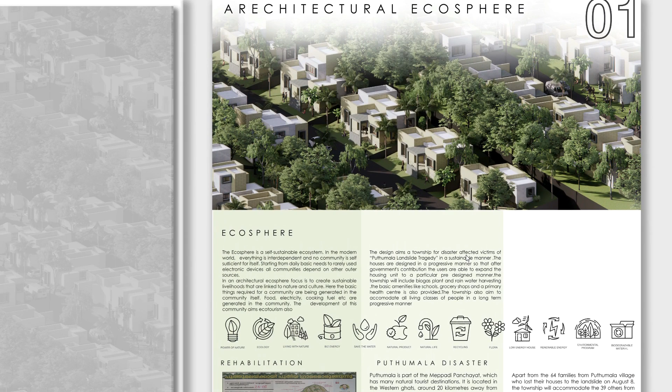I am Abdul Azeem and my project is Architectural Ecosphere. The word ecosphere literally means a self-sustaining ecosystem in which everything is interdependent on one another. An architectural ecosphere focuses on creating a sustainable livelihood linked to nature and culture. Here the basic things required for the community like food, electricity, and cooking fuel are generated within.

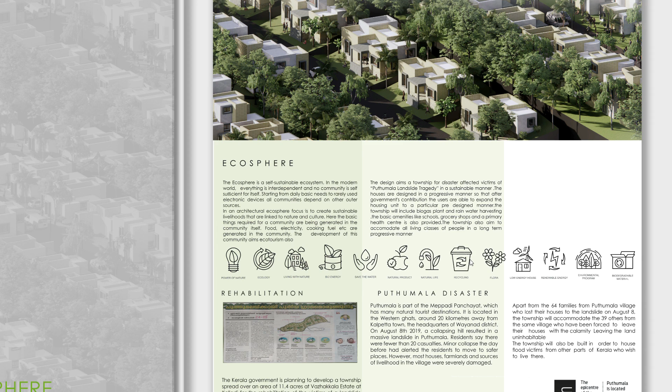In the year 2019, the people of Puthumala, a remote place in Wayanad district of Kerala, experienced a devastating landslide when the place received a much higher quantity of rainfall than expected, which resulted in loss of life, structures, land and their daily livelihood. When I heard that the government is planning to construct a new township for the disaster-affected victims near the affected area, I thought it would be a good opportunity to show how Ecosphere works in a community.

The people affected belong to a low-income group. They were mainly plantation workers and daily laborers. So a rehabilitation project for the low-income group was the key factor for the township.

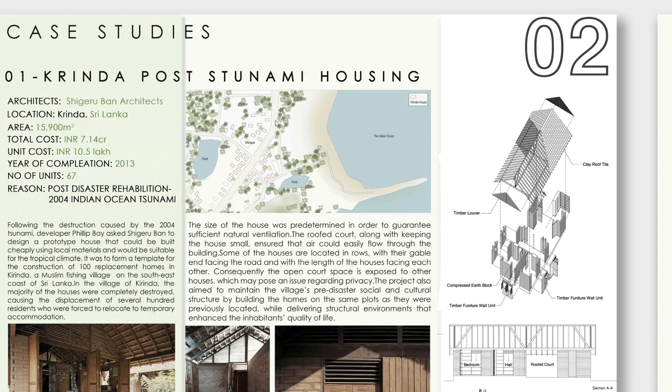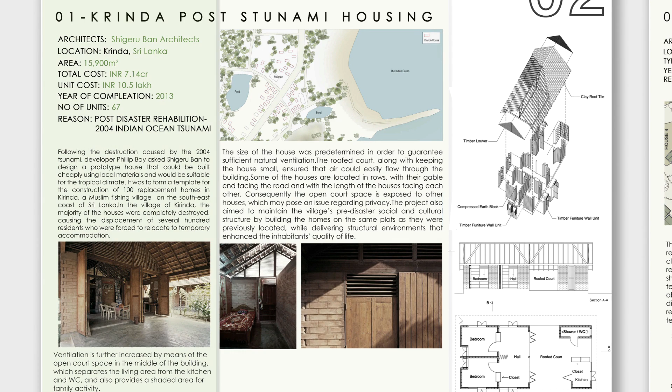These factors led me to check out some similar projects done in similar criteria. Some of them were the Kirinda post-tsunami housing in Sri Lanka by architect Shigeru Ban, in which he designed a prototype that could be built cheaply using local materials suitable for tropical climate. The other was the Jintai village reconstruction in China for farmers, which effectively used the small available patch of land to grow plants and raise cattle within the residential complex.

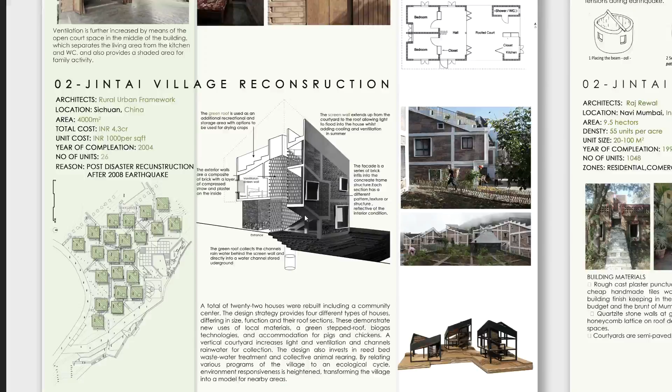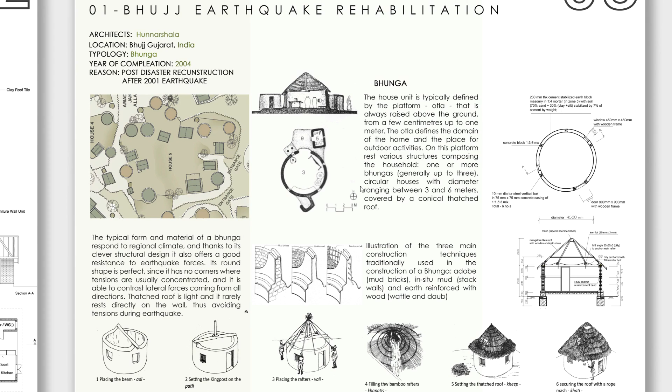A post-earthquake construction designed by Hunnarshala took me to a remote village in Bhuj district of Gujarat, where I got a chance to interact with the people and understand how the round bhunga structures are related to their culture by resisting earthquakes, and how Hunnarshala provided the technology to make it a reality. The people in the village come together to construct houses as a favor, expecting that they will get the favor in return.

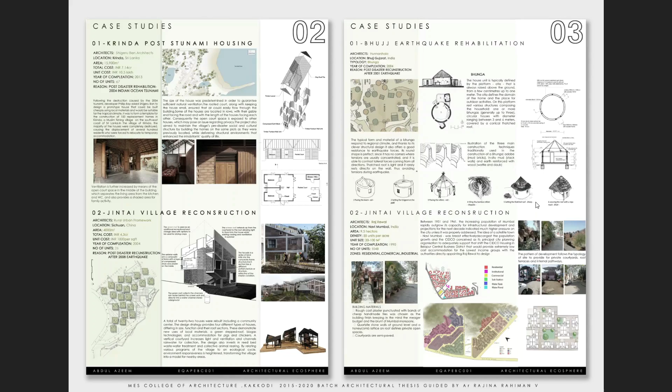So these experiences made me realize how a participatory design process can produce extraordinary results in a rehabilitation project. Also, using local materials and local craftsmen for designing can circulate the project fund within the community.

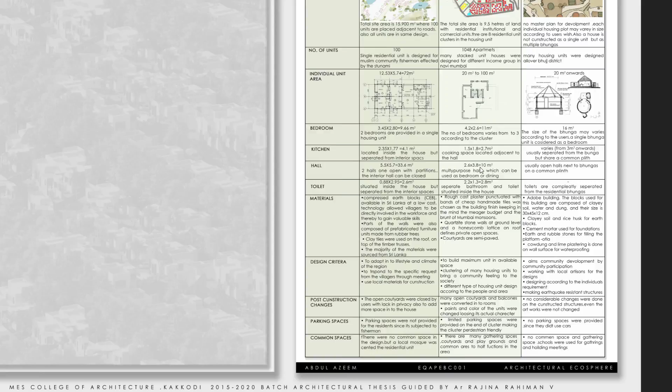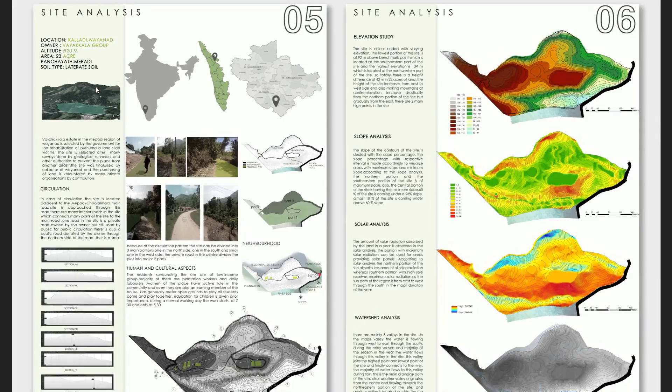So when I came back, I visited Puthumala, where I experienced how people used to live and learned about their culture by interviewing the disaster victims, neighbors, and social workers. I realized that even the women in the family are earning members, and they used to live so close to nature, growing and cultivating plants and animals, and even earning from them.

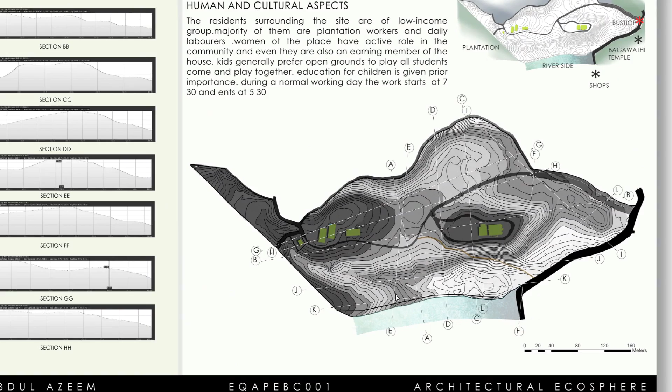The proposed site is 23 acres of land with undulating topography at high altitude in the foothills of the Western Ghats, which is presently used for plantation. With the help of software, I developed maps to understand site conditions with respect to elevation, which has a 42 meter height difference from one end to another.

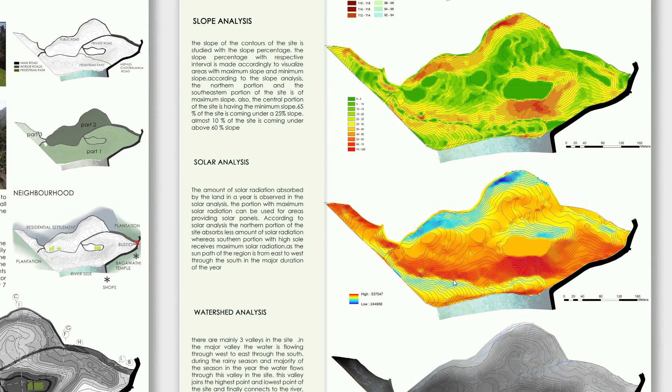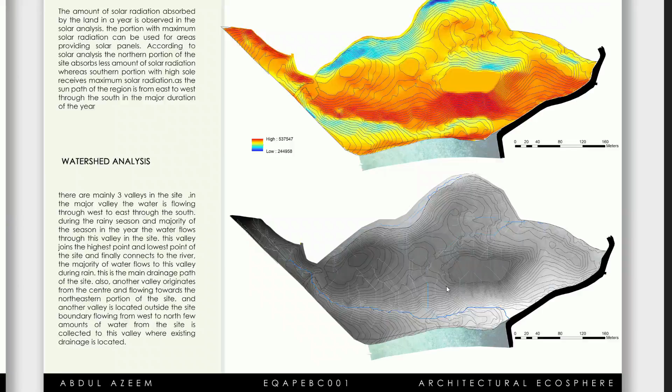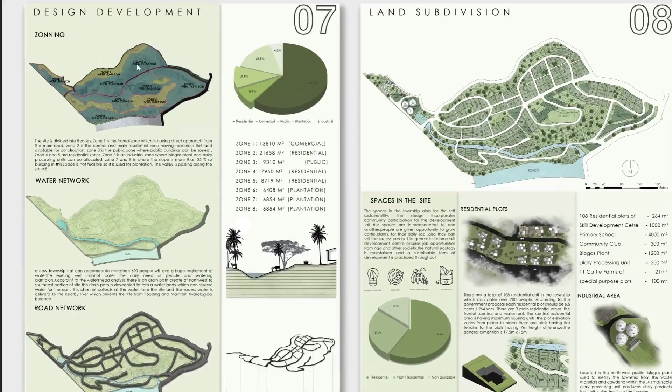By layering all the collected information about the site to determine how the design should be developed, the site was zoned based on its approach, the internal road divisions, and the slope map, which tells us which portions cannot be constructed on. According to these, the zones were residential, industrial, commercial, public, and plantations.

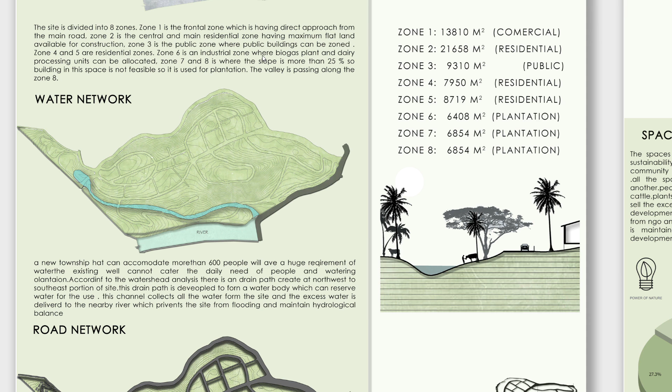In order to solve the demand of water when the township caters to more than 600 people, a water network is designed along the main valley in the site with the help of a watershed map.

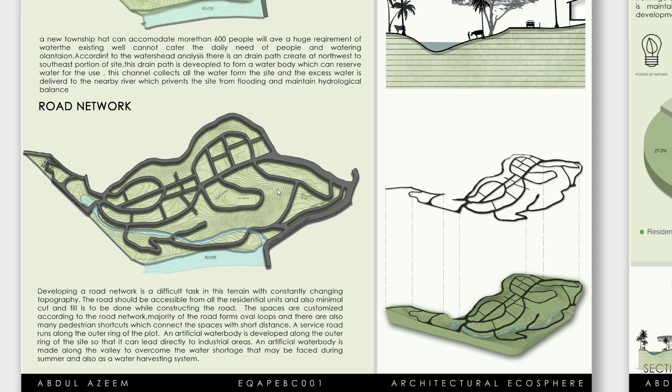The next and most difficult task in developing the site was to design the road network. Since the site has undulating topography, the road is designed by connecting points of the same elevation along the contour, minimizing cut and fill and relying upon the natural slope of the site.

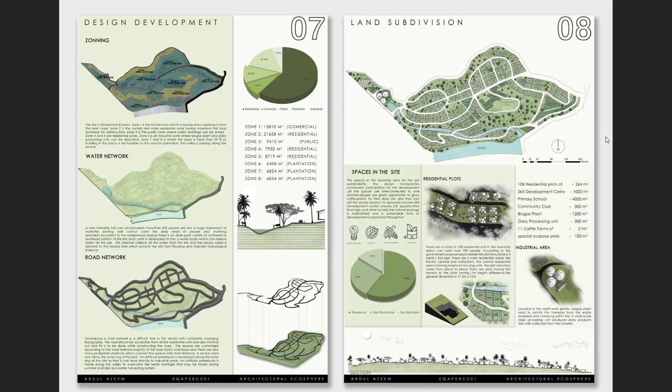So it led to the subdivision of the site by taking into consideration that the township will strengthen local community, connect people to one another, support the local economy in both how they build and how they work, increase biodiversity, improve health and welfare, and support environment.

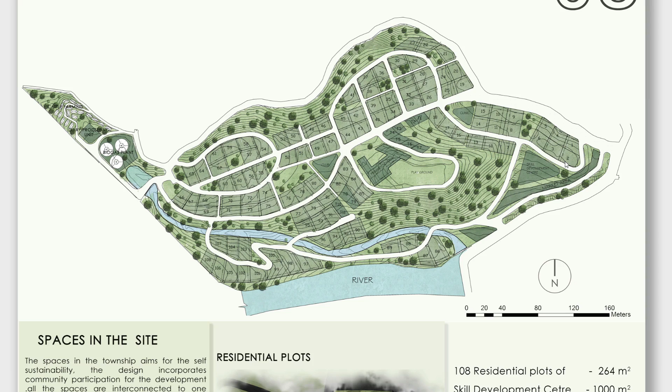Looking on to the government proposal and cross-checking it with what people really need in the township by interviewing the disaster victims, the land subdivision resulted in 108 residential plots spread across the site in the residential zone, where maximum flat land is available for construction. A 250-meter stretch of traditional market space is located near the main road, which will also attract tourists as the site is located in a tourist area of Wayanad.

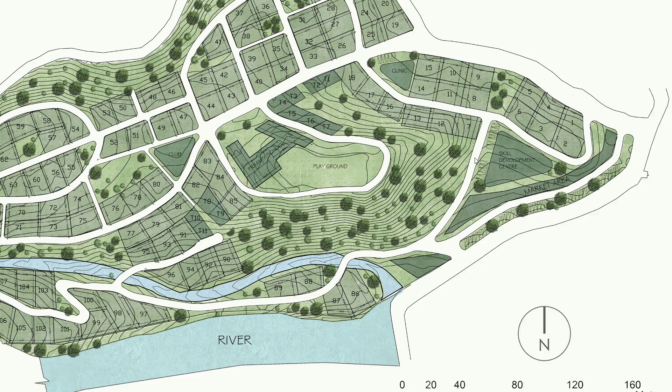A skill development center ensures job opportunity to the inmates by acting as a platform for NGOs and other organizations in or out the community. A primary school with playground, which used to be in Putumala, is recreated in the new township.

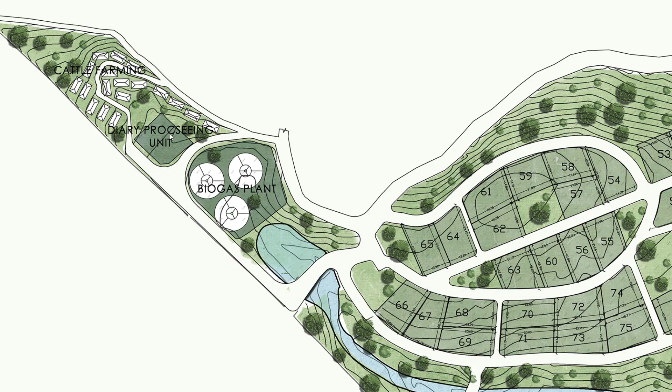In the industrial zone, the biogas plant produces bioelectricity and biofuel using cow dung and degradable waste materials, which electrify the whole township as they only consume a minimum amount of electricity. A small-scale dairy processing unit manufactures products using materials from the site, making every space interconnected to one another as in an ecosphere.

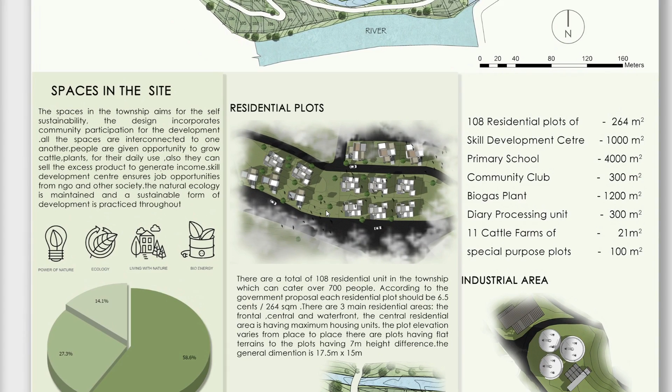Many common spaces are given in between the residential plots where grocery shops are located, and these relaxing spaces can be used to graze cattle and spend leisure time with the community, hence increasing community participation in the township.

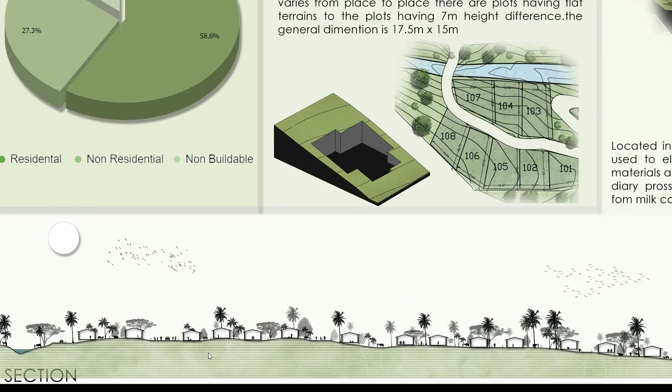Before going on to the residential building design, we must understand the limitations of the present rehabilitation system and develop a design strategy which should be followed throughout the design.

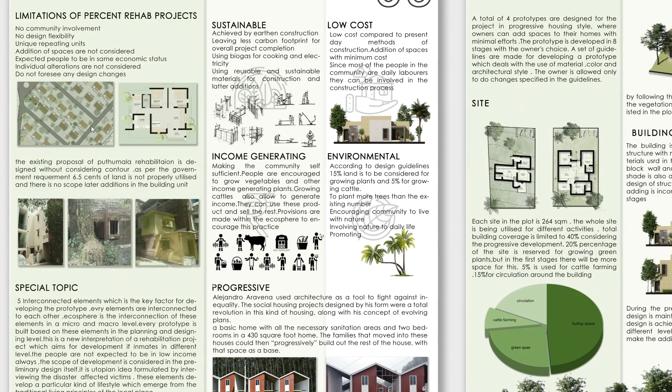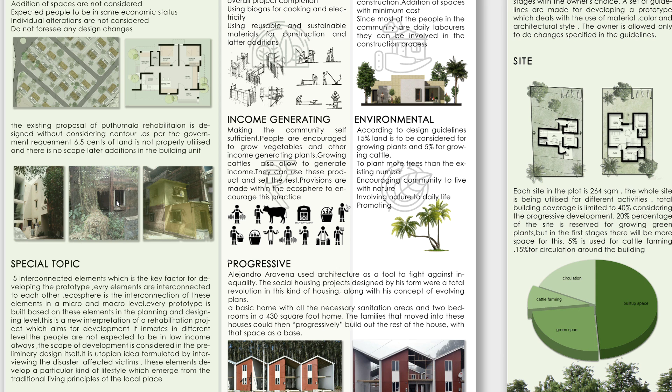Some of the limitations were there was no community involvement, no design flexibility, and the designs are the same and repeating. Addition of spaces was not at all considered, and the people are expected to be in the same economic status, and they do not foresee any design changes that people will alter after the construction.

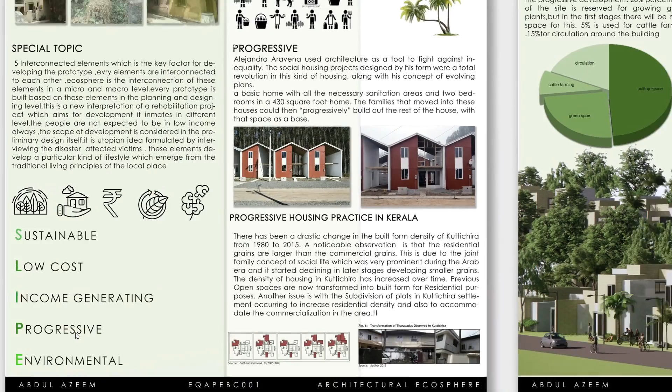So I developed 5 interconnected principles that should be followed in designing the township at both micro and macro level. They are sustainable, income generating, low cost, progressive, and environmental.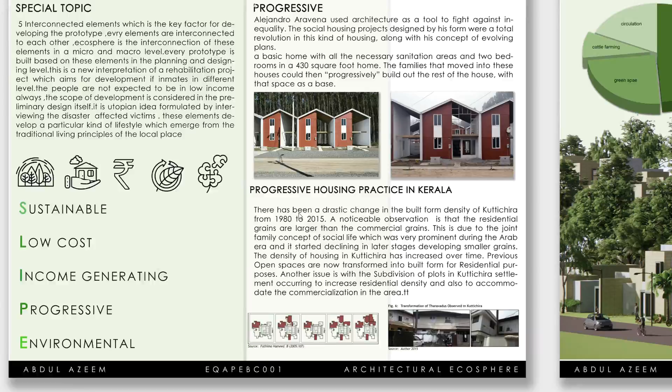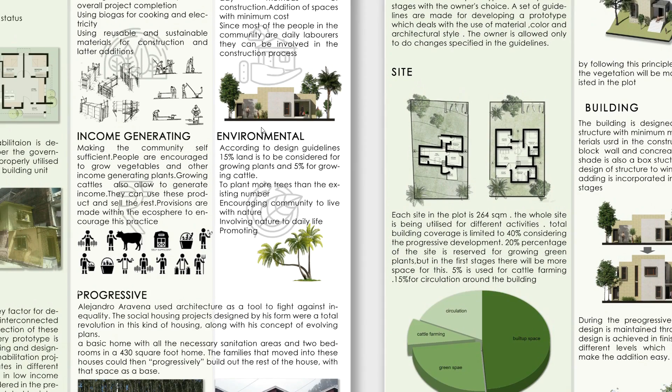Sustainable, achieved by earthen construction, leaving less carbon footprint for overall project completion. Using locally available materials will reduce the cost of construction, which is the second principle to minimize the cost, as many of the inhabitants are daily laborers and workers. Their contribution can be utilized to minimize the existing construction method cost.

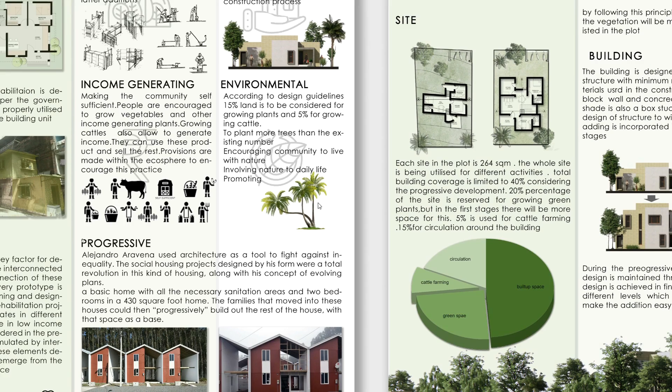In the income generating principle, the people are expected to grow plants and cattle as they can use for daily needs and excess to generate income to the house. As the potential of self-dependency, or Atmanirbharata, is increasing in the present day scenario, the income generating principle is very relevant in the context.

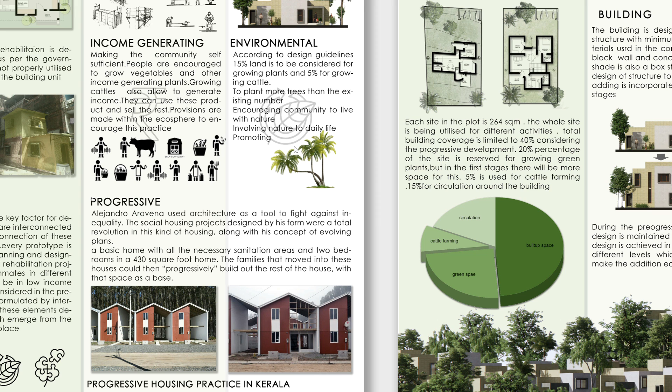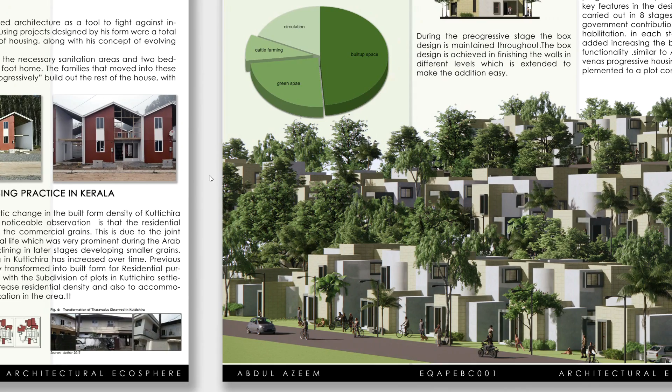The environmental policy literally means planting more trees, that is 15% of the residential plot is to be developed with green areas having plants and trees. So if we can design our residential buildings to include plants, trees and greenery, we are not only benefiting individuals, we are supporting the community at large.

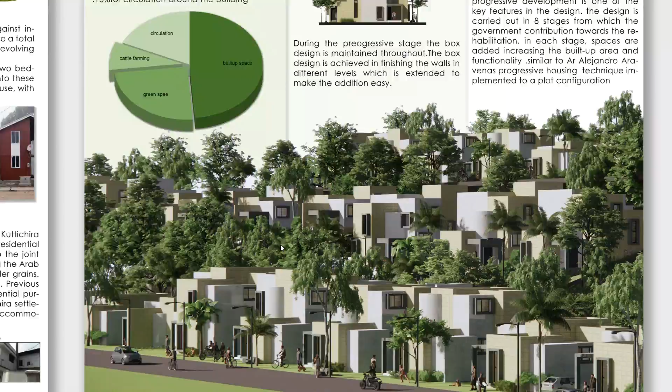All these principles make the ecosphere so interdependent to one another and make the community self-reliant. The next principle is progressive housing. Due to the lack of initial investment, rather than building a small home, half of a good one is constructed, after which people can take over it and develop on their own.

This is practiced by architect Alejandro Aravena in his housing project called Elemental. Similarly, in Kerala, we can experience similar progressiveness in the Kuttichira Tharavadu houses, which prefer joint family rather than nuclear. To accommodate increasing population, the spaces in the house are changed and new ones are added up.

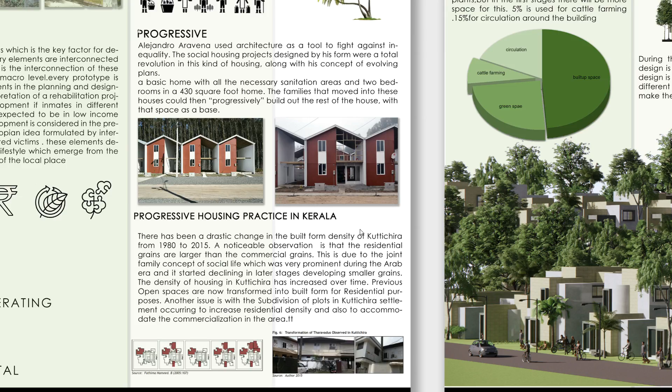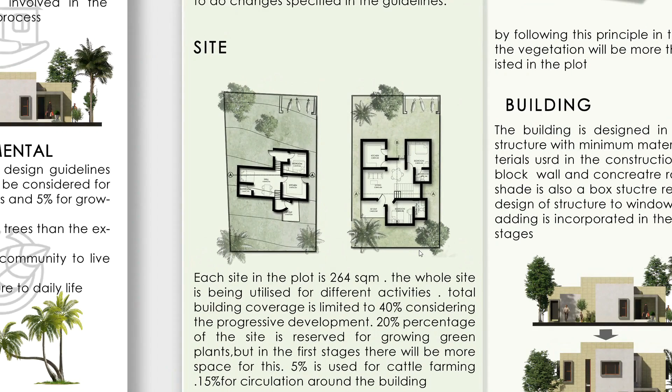Moving on to the prototype development, according to the government proposal, 264 meter square of plot is to be given to all, creating 4 types of prototypes which are designed based upon the plot condition, shape and topography. Every prototype follows similar principles but different designs.

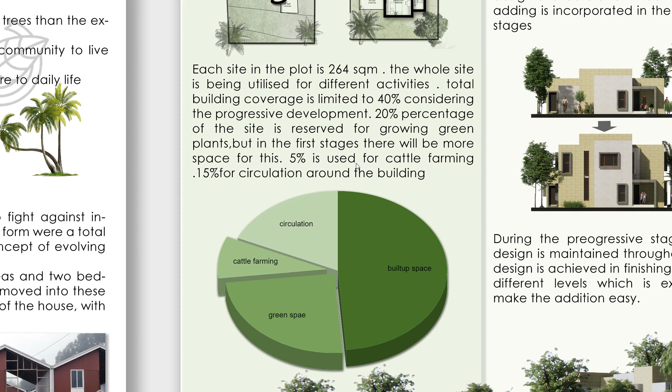At the site level, the whole residential plot is used for different activities. The total coverage is limited to 40%, 15 to 20% to grow plants, and 5% to grow cattle. By following this, the township will have more trees than it used to have earlier.

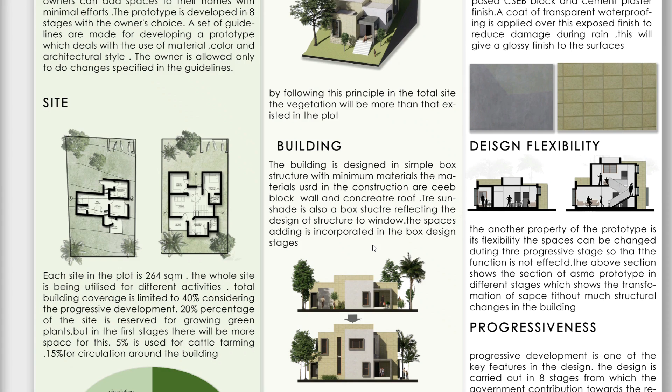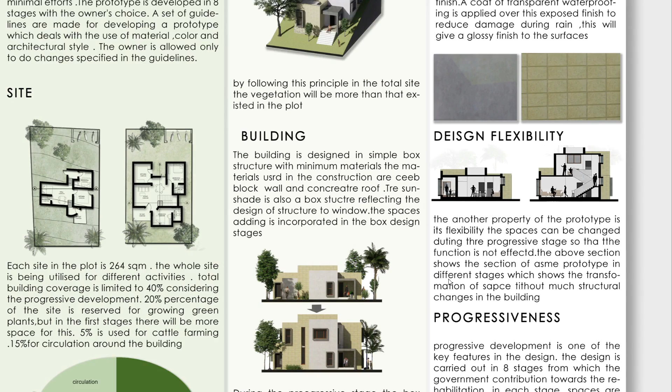The house is constructed in a simple box design using less materials, which are also available locally. The design aesthetics is maintained throughout the additive process. The finished face is exposed CSEB block with cement plaster finish. The design is developed in 8 stages, such that a small space is added in each stage.

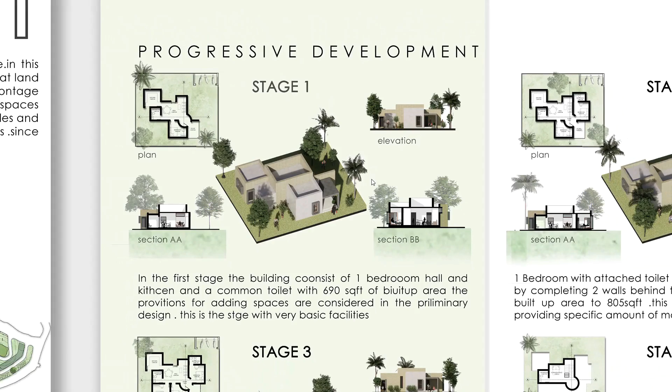Prototype A has 30 dwelling units in a site where the plot is flat or with minimal height difference. The initial spaces are compact, designed by analyzing the culture and requirement of the people. After the government's contribution in stage 1, people can take over and add spaces in stages.

Looking at the progressive housing closer, in stage 2 a room is added, and in stage 3 another. Moving to stage 4, the first floor is added by creating some spaces on the ground floor to accommodate the staircase and other spaces, as you can see clearly in the section.

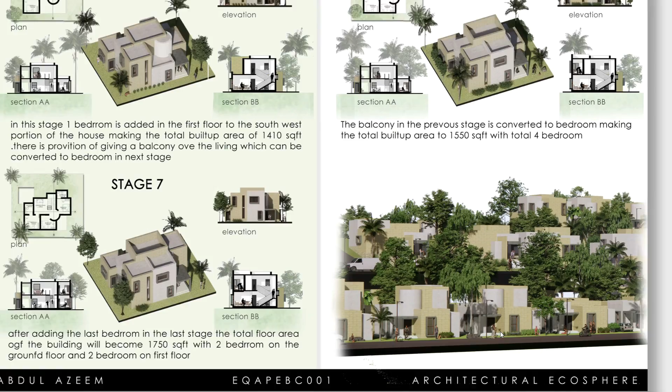Similarly, in the following stages, rooms are added up, finally making a house with 4 bedrooms, hall and kitchen, with an average size suitable for a middle class family.

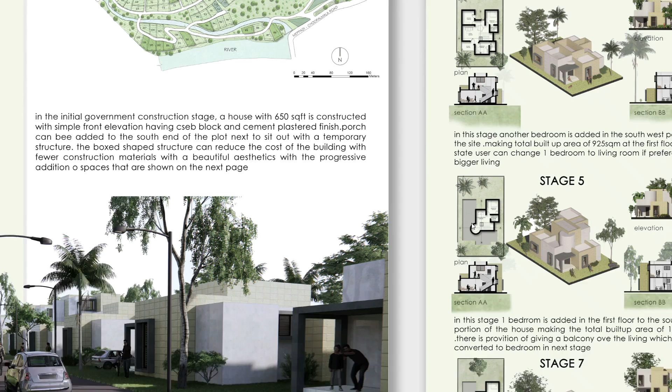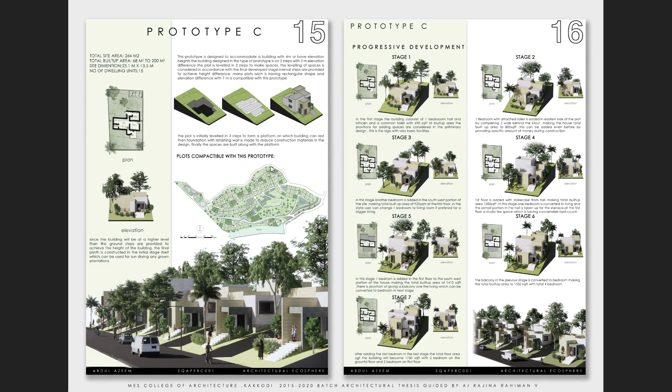Similarly, prototype B is designed for flat land, with the same principle but different orientation of plot. As you can see in the progressive development, it is similar to prototype A but different in design and orientation. Coming to prototype C, this is designed for plots with high contours.

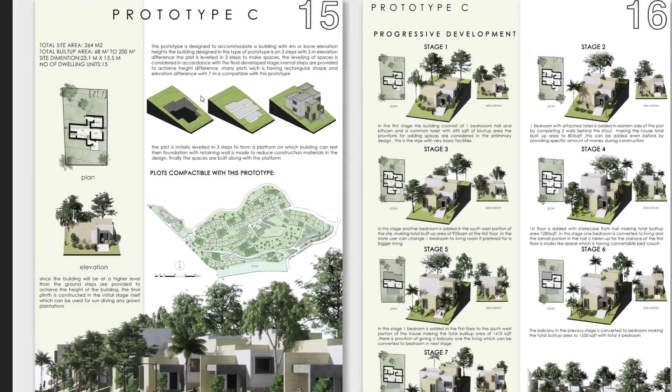These plots have an elevational difference along the shorter side, with a height difference of 4 to 7 meters. In this prototype, the land is cleared in a stepped manner to receive the spaces, positioned along the steps with an internal staircase. Then the foundation is laid considering the final developed product.

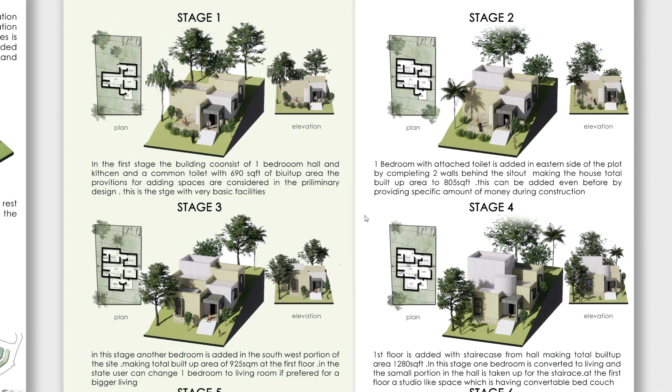As you can see in the development stages, the rooms are added on steps while maintaining the same aesthetics of the box design.

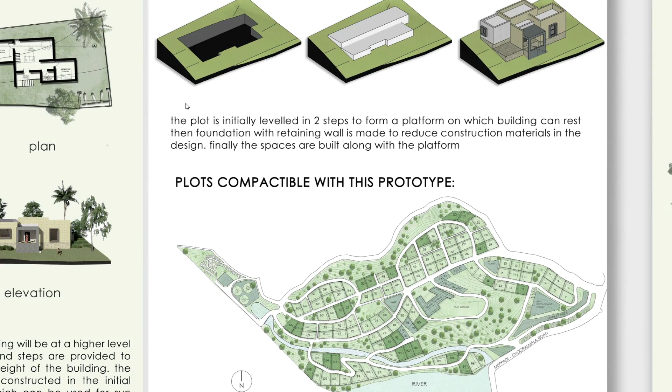Similarly, prototype D is designed in contour but with minimal height difference along the longer side. The box design, which is for aesthetics, can also be used as a functional element to add space in the upper floors, as it acts as a primary base wall.

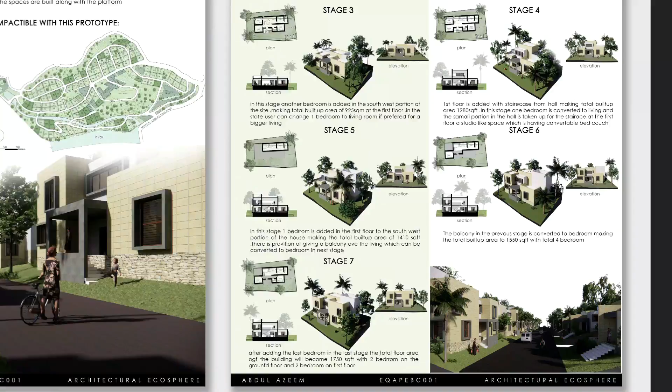Also, the box design is used as sun and rain shades for the windows, which can be placed at different locations to reduce the effect of overlooking with respect to sight. Prototype D is designed in 2 steps with a more rectilinear shaped building.

Finally, with all these prototypes, the site is designed by placing each prototype in a particular position. The buildings do not have any boundary walls differentiating them, to increase the community feeling throughout the site.

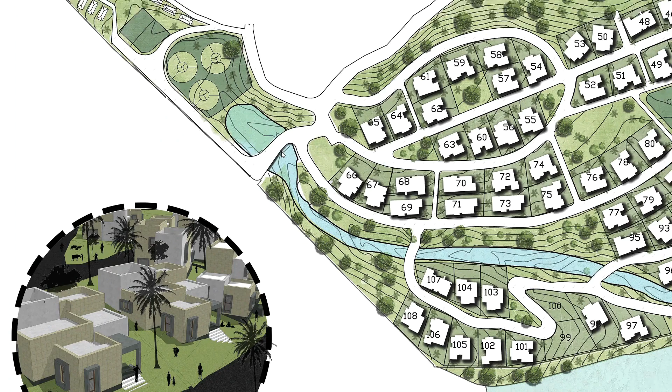The position of interior spaces can be changed according to the orientation of the building with respect to wind direction and Vastu principles. It can vary from plot to plot and according to user choice.

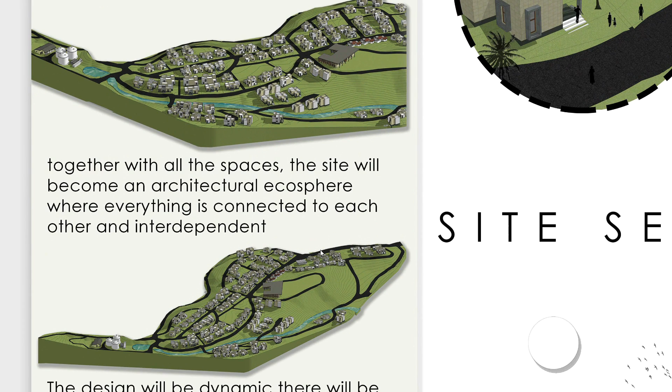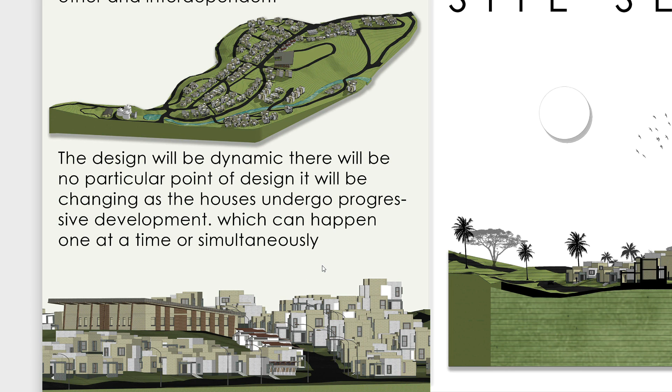The design will be dynamic. There will not be any particular fixed point of design. It will keep changing as the houses undergo progressive development, which can happen one at a time or simultaneously. Together with all the spaces, the site will become an architectural ecosphere where everything is connected to each other, interdependent and self-reliant.

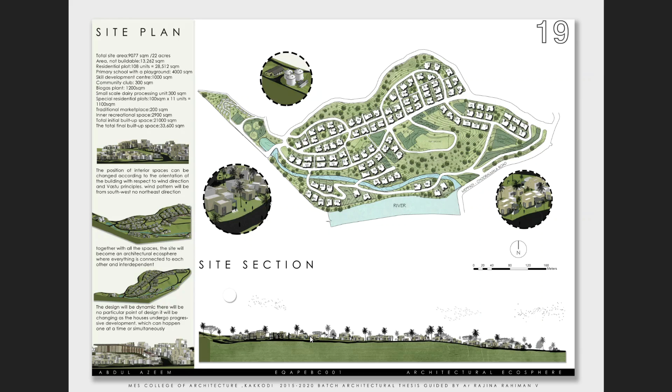With this project, what I am trying to create is a new interpretation of a rehabilitation project where people have participated in the design process, creating a lifestyle rooted in their culture. Together as a community, they can grow, cultivate and earn progressively from the township, as I design an architectural ecosphere enabling it.

As I said in the beginning, the effect of architectural building on both the individual and wider society is far broader than just a shelter. Thank you very much.

We should put all our efforts into a lot of small things rather than all of us wanting to build one or two big masterpieces. We've got to stop thinking big and go back to the idea that small is beautiful.